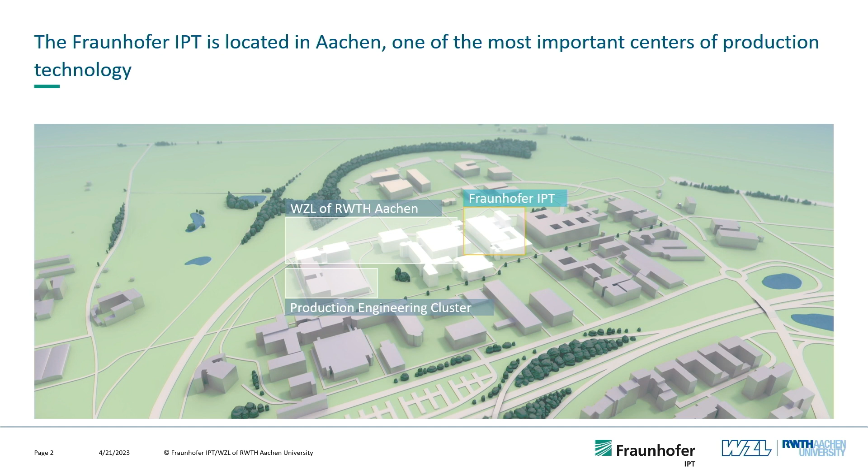So that means we have a strong university background, a strong scientific background. We work together with the WZL in Aachen, so that's one of the biggest institutes for production-related issues. And we are close to the production engineering cluster, where we face issues about the production, not just for fuel cells, for electrolyzer, or for the hydrogen economy itself, so for a lot of different topics.

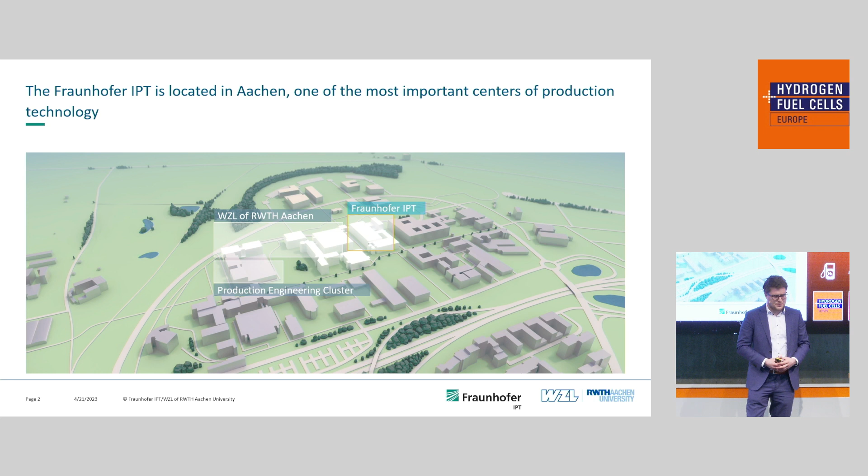I would like to focus, of course, as the name of the presentation today says, on what we do about the production for fuel cells and electrolyzers. So we're facing these challenges in a lot of different ways. First of all, we look at the machine and the tool construction. So we say, okay, what kind of machines and tools are actually needed to ramp up and to scale up the production for the different components, such as the bipolar plate, the membrane, or the tanks for the hydrogen

economy. So the products we are facing are mainly focused on the stack components. All these components we need to produce in a highly scalable manner. Just imagine if you have a fuel cell with about 350 cells, we talk about 700 bipolar half plates you need to produce. Imagine you would like to produce 1 million fuel cell cars. We talk about 700 million bipolar plates you need to manufacture in a really precise way.

And what we do there, we start with a holistic view. We say, okay, what are the demands? What's the market perspective on the production point? We have a look at the technology, so what kind of production technology is available for the different process steps, for instance for the cutting, the forming, the coating, and the welding of the different plates, staying with the example of the bipolar plate.

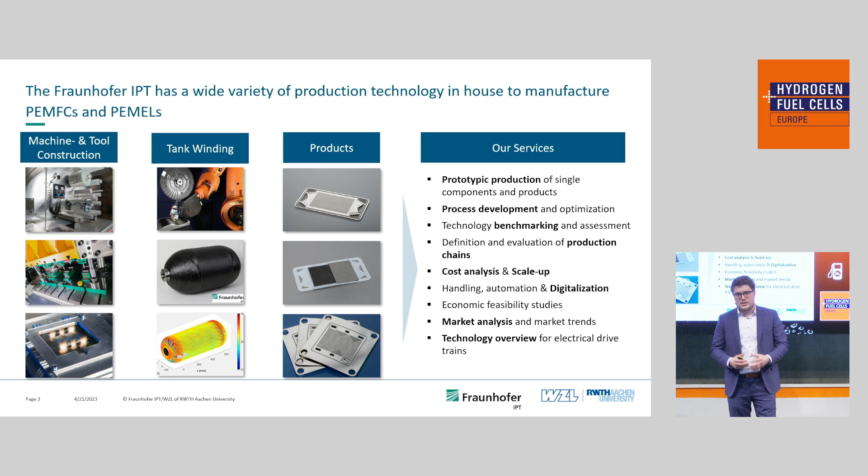But we go down to the really deep dive level as well, so that we have the prototypic production and you as a customer can work with us together to design your own stack and your own component designs. We do that in the business unit of energy storage systems at Fraunhofer IPT for the fuel cell on the one hand and for the electrolyzer on the other hand.

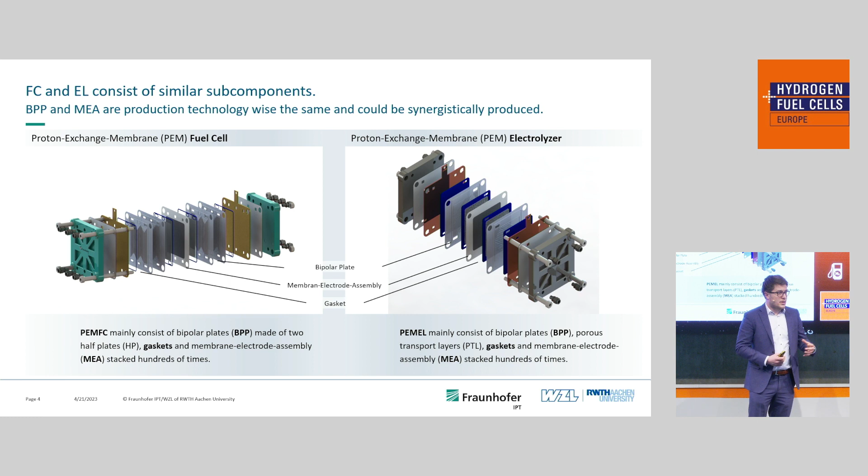We started some years ago with the fuel cell and had a look at the bipolar plate, the gaskets and the membrane electrode assembly, and shifted then, because there are a lot of similarities in the parts and the structure of the electrolyzer and the fuel cell, to the PEM electrolyzer, and now to the alkaline and the anion exchange membrane electrolyzer as well. So there are a lot of similarities, but we also have a lot of differences in terms of requirements, the pressure, the sizes, and the production volumes for these different systems.

So I'm in the integrated production machinery department, and we look at the whole value chain for the fuel cell and the electrolyzer. That means what do we need to do to come from the raw product, for instance from stainless steel, from raw material to your finished plate.

And we don't look just at one single production step itself, we look at the interdependencies between the different production steps. So what do you need to do in production step one? What kind of requirements do you have to fulfill for the next production step afterwards, so that you get your finalized product in the end.

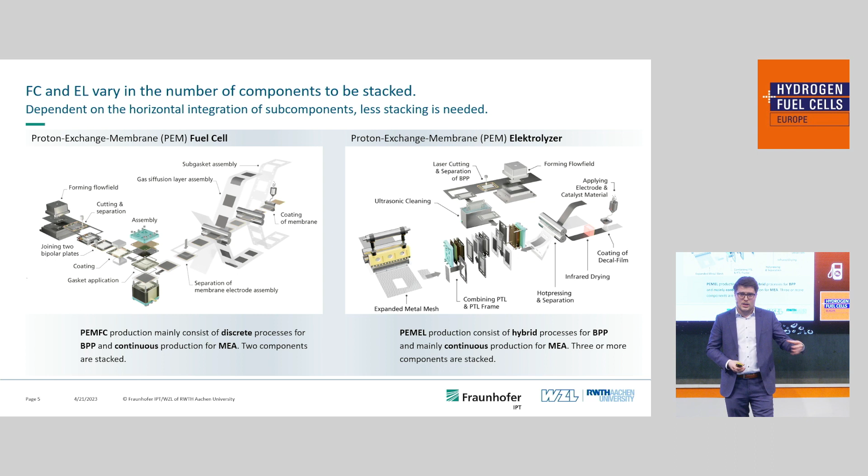So why are we doing it? I think the whole booth here is just about hydrogen, about fuel cells, about electrolyzers, hydrogen combustion and the whole hydrogen economy. So the reason for that is pretty simple. On the one hand, when we look at the scale-up of fuel cell cars, we are expecting more than 2 million sales of fuel cell electric vehicles in 2030.

So if we are looking at the chart on the left-hand side, we are in 2023 right now. So that's a strong increase in production volume needed to fulfill these goals for the main markets: China, Europe, Japan, South Korea, and the US. On the other hand, in the electrolyzer business, we don't talk so much about cycle time. We don't talk about the numbers itself.

We normally talk about gigawatts and megawatts that are needed, which we can break down afterwards into needed production volumes for the single components, such as the bipolar plates, the membranes, and all the components you need to have your finished electrolyzer, alkaline or PEM in the end. So there we normally talk about cycle times of about 10 seconds per part, and we have a high flexibility in the design and the product architecture.

So on the electrolyzer side, we have a lot of different designs that lead to different requirements and different kinds of production technologies which are needed for the ramp-up. And on the other hand we have the fuel cell, which is more or less highly standardized for now, but where we need cycle times, because of the high production volume, of about 1 second per part. Just imagine you need to produce one part every second, so from the production point of view that's quite a challenge.

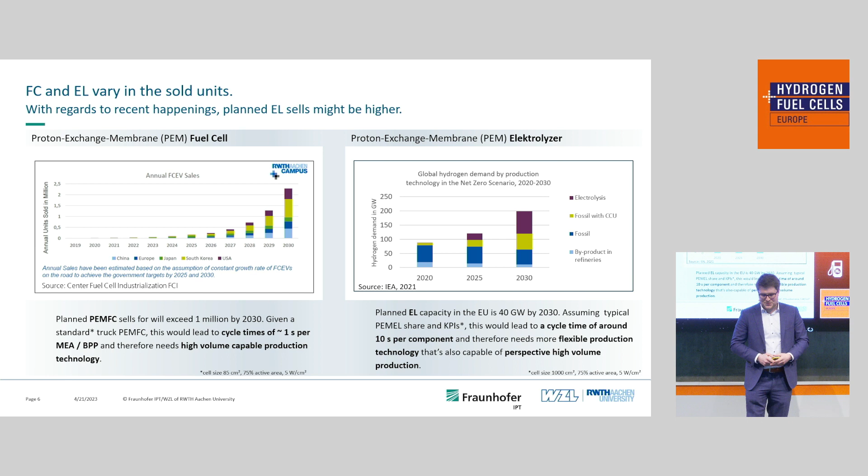So we face that at Fraunhofer IPT together with our colleagues from other Fraunhofer institutes, together with industrial partners who would like to go into the hydrogen business and the production of these single components. But we do that as well in big research projects with a scope of 3 or 5 years, where we have a wider view into the future in terms of production technology.

And one of our main research projects now is the H2Go project, funded by the German government, where we look at every single production step and phase in the production line for the fuel cell components. So that's the fuel cell side right now. So that in the end we have one industrialized process chain for the highly scalable, low-cost production of the fuel cell components, for the bipolar plate, which you see here, and for the MEA.

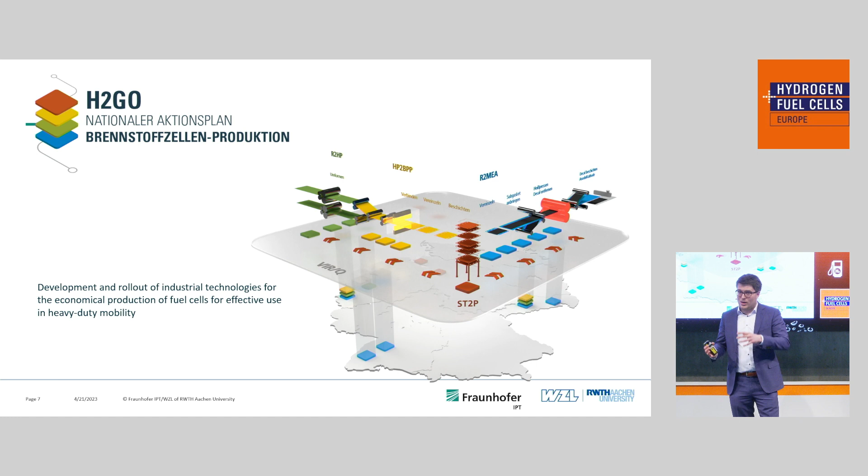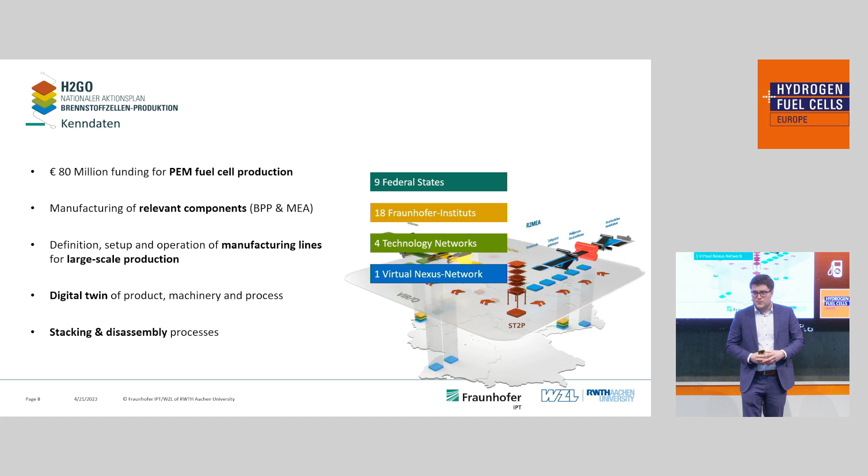And we do that in a Fraunhofer consortium based on the knowledge we have in the different Fraunhofer institutes. That means we have a lot of experts all across Germany, and we use their expertise really well, so that not one person does everything and the competence stays where it is right now. So we have about 9 federal states involved in this project. We have about 18 Fraunhofer institutes working on this 4-year project in total, where we define, set up, and operate manufacturing lines for the large-scale production of PEM fuel cells for the future.

Coming from the fuel cells back to the PEM electrolyzer. Another project we are working on right now is the H2Giga project, where we talk about the Referenzfabrik. That's the German name, the reference plant architecture translated into English, where we do the same for PEM electrolyzer production, together with other Fraunhofer institutes as well. There we tackle the challenges of PEM electrolyzer production, like the high flexibility, the large differences in product architectures, and the demand for the single technologies.

Within that, the project is a little bit smaller. We have funding here of 20 million euros for the investments to really develop these technologies, so that's not just theoretical and concept knowledge, and we can actually produce the single components ourselves. So we started by designing a reference architecture for the PEM electrolyzer, so that we have a reference stack where we face all the production-related issues for high-volume production, and we can iterate based on the standard design.

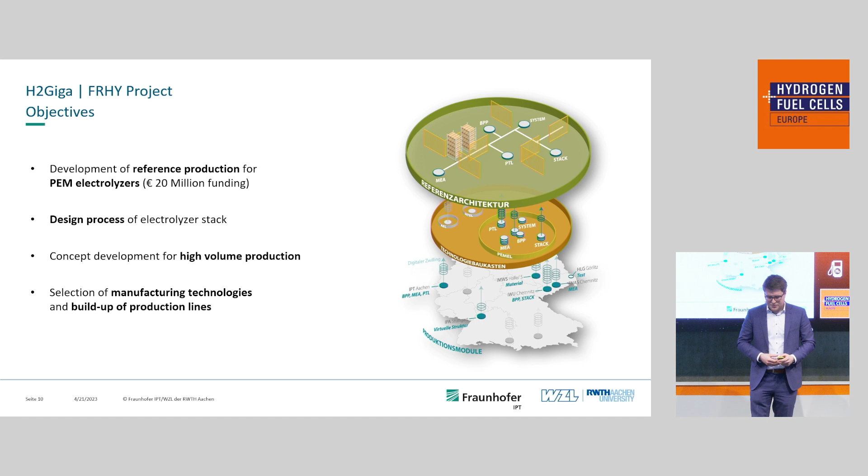And all this knowledge we gain in this research project phase, my colleague yesterday already presented it to you, in this reference factory. So the overall goal is that we build up kind of a technology kit of the different production technologies. As we say, we have for every process step different opportunities, for instance, to form, to weld, and to coat our bipolar plates or our components, and that we can benchmark the different production technologies and process technologies for the different use cases for the fuel cell and the electrolyzer business.

So it's all about transferring the knowledge from the big research projects into, let's say, one knowledge box. The second thing we do in there is offering services for the industry. So, for instance, having partners which are facing just one technology step, we can look at the whole value chain and offer, okay, we do the steps beforehand and afterwards, so that we have the whole value chain covered for our single customers.

The third, and maybe the most important idea, is the platform character of this reference factory, where we say, okay, we have the possibility to connect the different partners in the value chain. So the manufacturer for the steel, for instance, with the forming specialist, with the coating specialist, so that we have the creation of this value chain on hand, and where we can work on the different production technologies with the